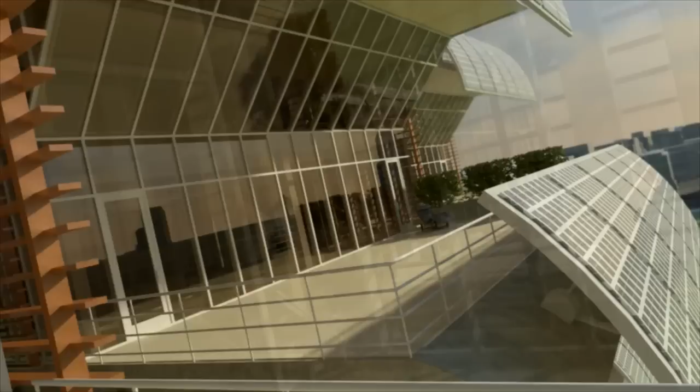Creating realistic images has never been easier with 3ds Max and 3ds Max Design using iray rendering technology from mental images. You will be able to generate physically accurate renderings without having to adjust and guess at any of the rendering settings. Let's use this condo space as an example.

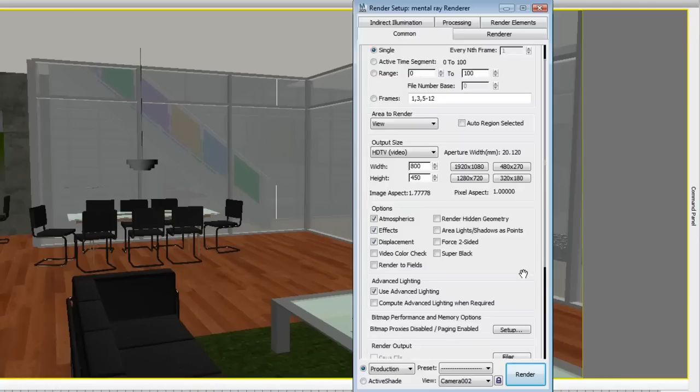To help you understand the difference between iray and other renderers, we will first render this scene in mental ray. Mental ray, like most other rendering solutions, always requires a bit of guessing when it's time to fine-tune the rendering settings. The rendering window offers 5 different tabs, and it can be a bit daunting to figure out all the settings if you are not an experienced user.

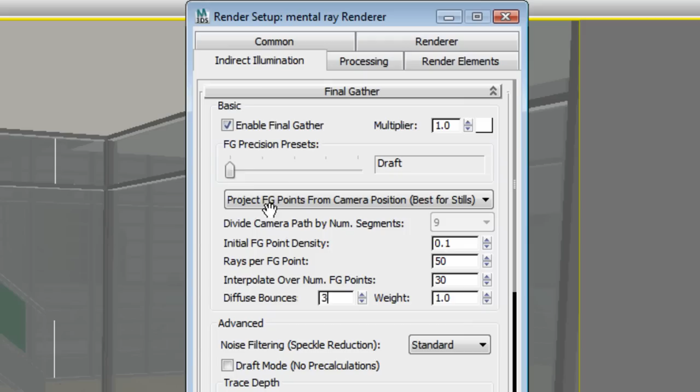For example, to achieve high resolution for this interior space, I first need to go to the Indirect Illumination tab and increase the amount of final gather bounces. I will also refine the final gather precision. Then, under the Renderer tab, I will increase the Soft Shadow Precision multiplier to 4, Glossy Reflection and Refraction multiplier to 3, and increase the sampling quality to minimum 1 and maximum 16.

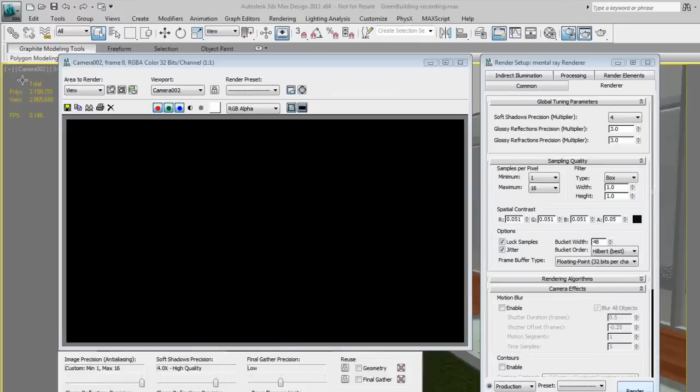This scene is quite heavy at 3 million polygons, which will definitely slow down my mental ray calculation. During the rendering process, the multiple mental ray passes allow me to guess what the rendering result will be, but I need to wait till the end of the rendering to save a usable image. Since this rendering is using high-quality rendering settings, it took 2 hours, 40 minutes, and 48 seconds to render.

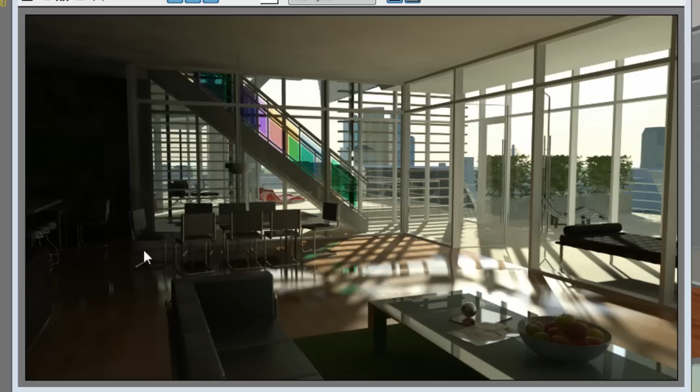The result is very promising, but there's still some area of darkness where I expect to have light entering the condo, which will leave me guessing what setting I will need to refine in order to achieve better results. A technical expert will be able to quickly guess at the right settings for an optimal result, but many people do not have the desire or the time to learn the subtleties of the settings.

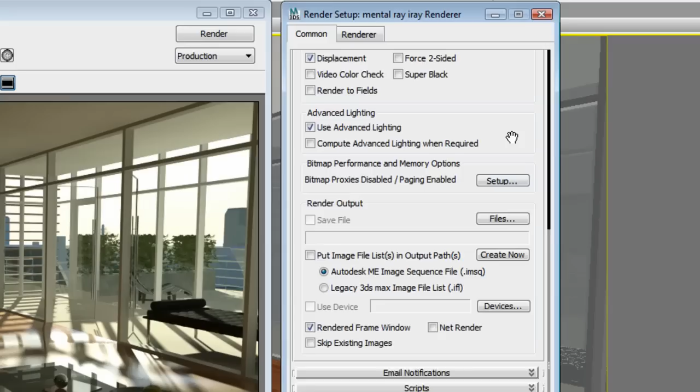Let's switch our rendering engine to iray and compare the process. You will notice that the Rendering Setup window Common tab stays the same and that only one additional tab is available for iray rendering settings. Basically, the only setting you need to adjust to have a physically accurate, photorealistic rendering is the rendering time. You can either enter the time by hour, minute, and second, number of passes, or let it render until you decide to stop it. So the rendering time is always predictable.

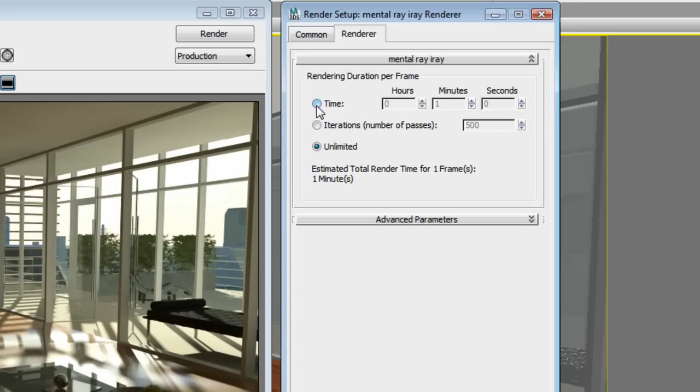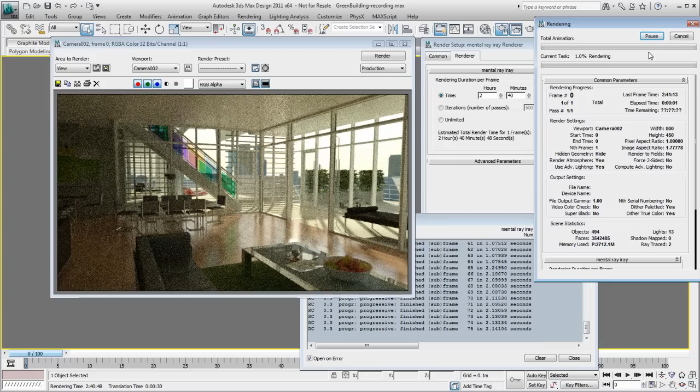Let's render this image for 2 hours, 40 minutes, and 48 seconds, which is the same amount of time our mental ray rendering took. The minute iray starts rendering, you can start seeing results. The image gets slowly refined as the number of passes increases. Plus, at any time you can pause and save the image of the rendering process. Iray progressively refines the image until the desired level of detail is achieved or the limit you have entered is reached.

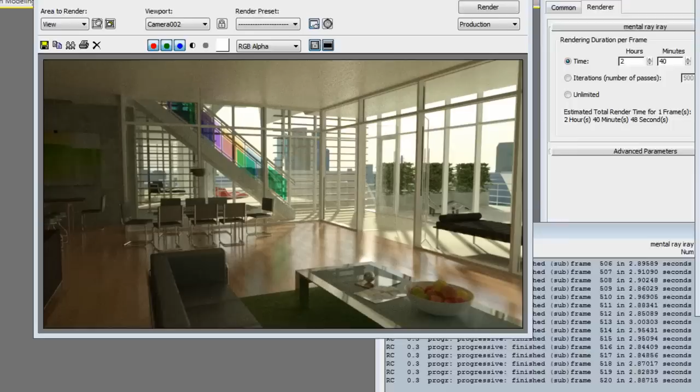You can now focus on applying physically accurate materials such as Architecture and Design material or Autodesk materials, photometric lights, and settings that truly resemble what you experience every day. Iray will give you a physical light calculation rendered, not an approximation of the results.

You can see here the image at about 25% completion, and already I can predict the final quality of the image. I will stop that render and show you both images that have been rendered for the same amount of time side by side. You can clearly see that the iray render bounced the light accurately in this space, giving me exact real-life results.

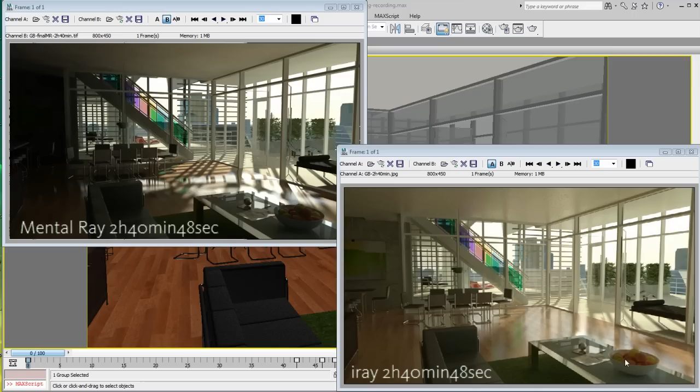Notice the soft shadow precision, the quality of the reflection here on the wood floor and in the ceiling paint. Fine details have been captured on objects and the rendering results have photorealistic quality. Plus, the iray rendering calculation is independent of the polygon count, so you can have a really heavy scene like this one without affecting your rendering time.

With iray, you will be able to understand how light enters your space, view soft reflection in your material, capture fine details on objects, and even view your self-illuminated objects accurately. The effect of self-illuminated material is clearly shown here in this scene. The luminance amount is accurately calculated, giving me predictable results, something that was to this point impossible to render accurately.

Depth of field, which increases the photorealistic look of your image, is also part of the rendering calculation and does not add any rendering time. Iray enables you to set up your scene, press render and get predictable photoreal results without worrying about rendering settings, just like a point-and-shoot camera.

Iray progressively refines the image until the desired level of detail is achieved while letting you stay focused on your creative vision. Iray will work with standard multi-core CPUs. However, you can significantly accelerate the rendering process with minimal investment by purchasing NVIDIA CUDA-enabled GPU hardware.